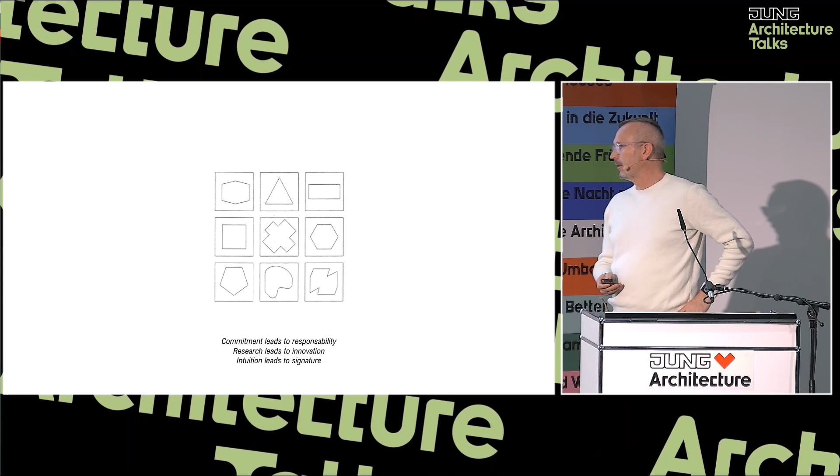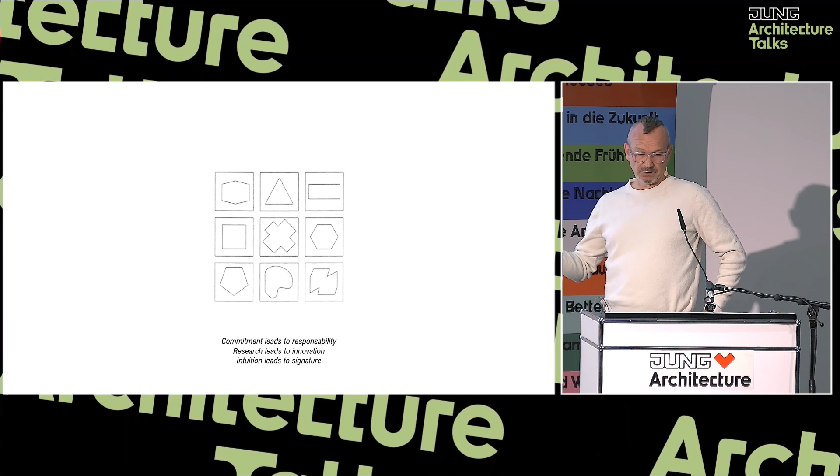We are a researching practice, which sometimes leads to innovation. And of course, for research and the design process, intuition is important because it can lead to our signature.

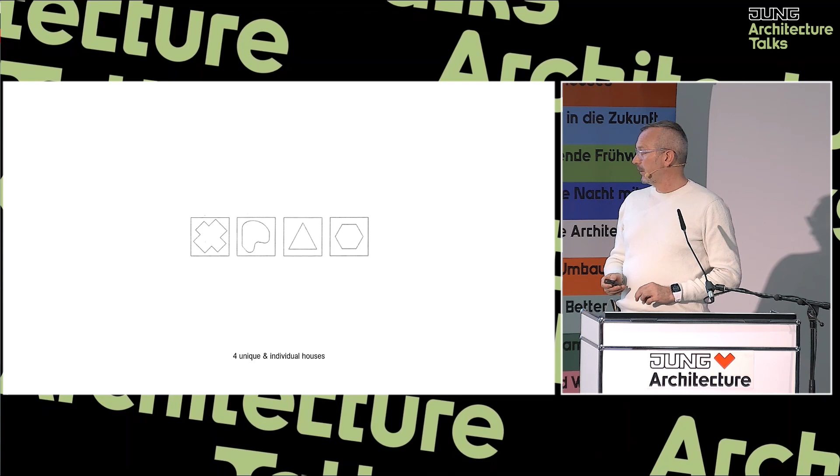So we're looking for 4 projects to present. It's like a PlayStation logo a bit, quite unique. All 4 are built in a hybrid way with brick and wood.

We try to use the material in its honest and best way, because in Belgium we don't have a lot of resources, but brick we have, and a little bit of wood, steel, and concrete, so we try to use them together in the best way.

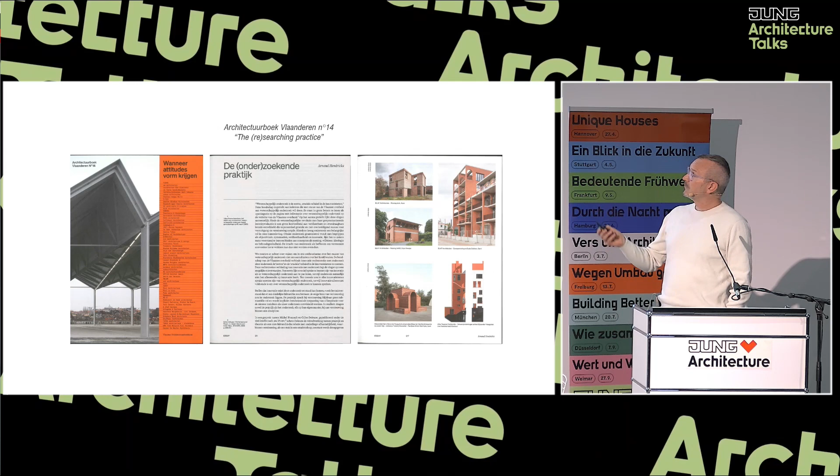We started in 2003, known for our researching and searching practice in Belgium. At the moment we work with 20 people.

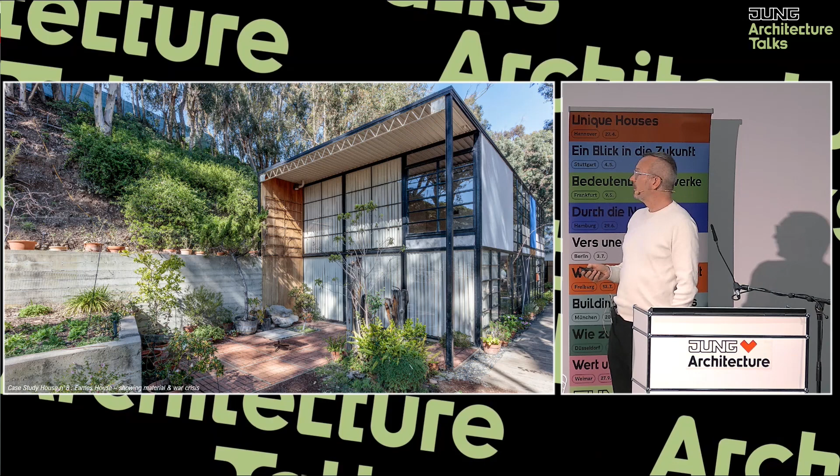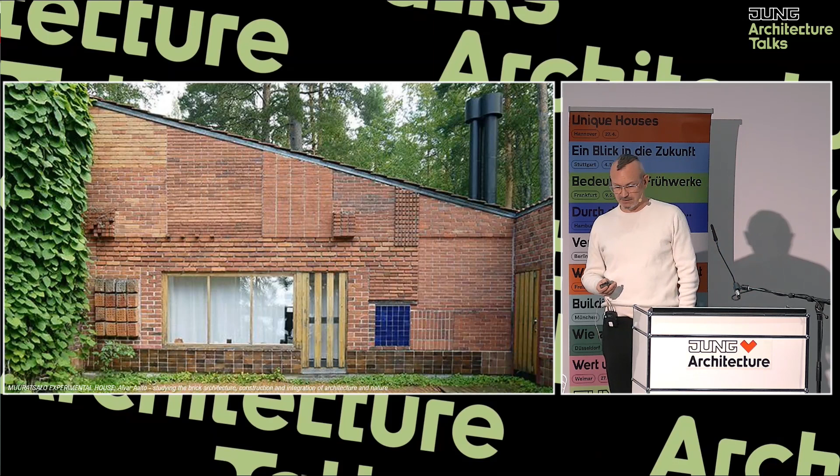First, I'll show some intro. Historically we worked in an experimental way, using the individual house as an experimental process, like the case study houses, where we learned how to show material as it is. Aalto showed us how to integrate nature into architecture, and we experimented with brickwork.

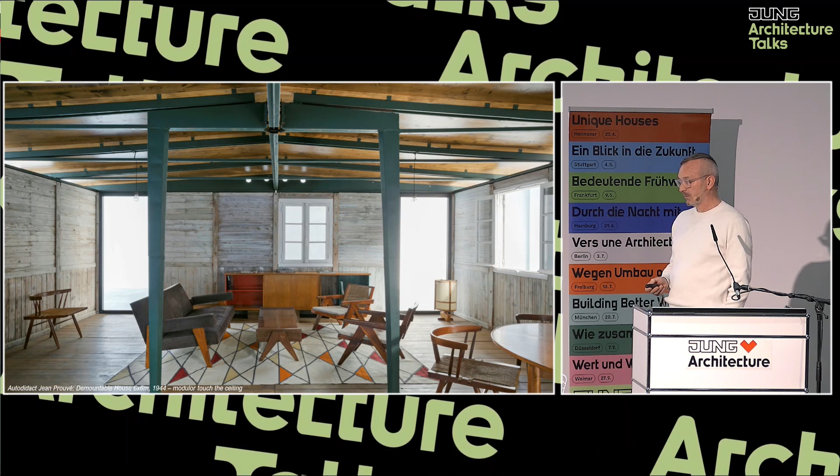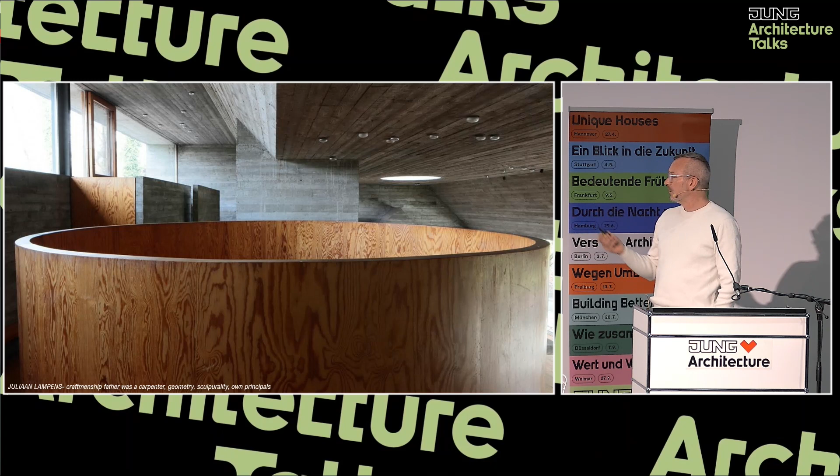The autodidact Jean Prouvé was already looking for demountable houses, and the Belgian architect Juliaan Lampens inspired us in a more brutalist way. His father was also a carpenter, like mine. He worked in the sphere of geometry, building in a sculptural way, and stuck to his own principles.

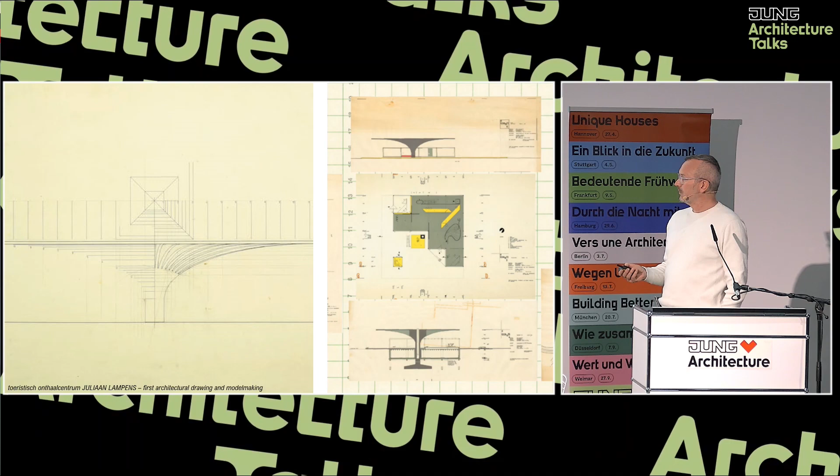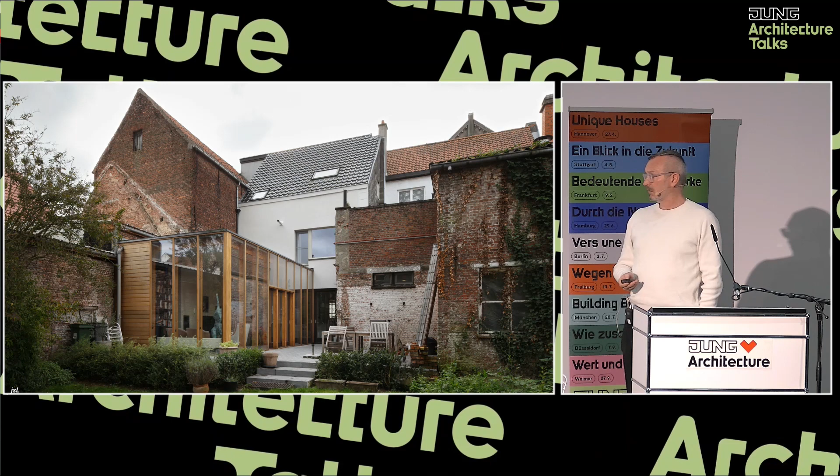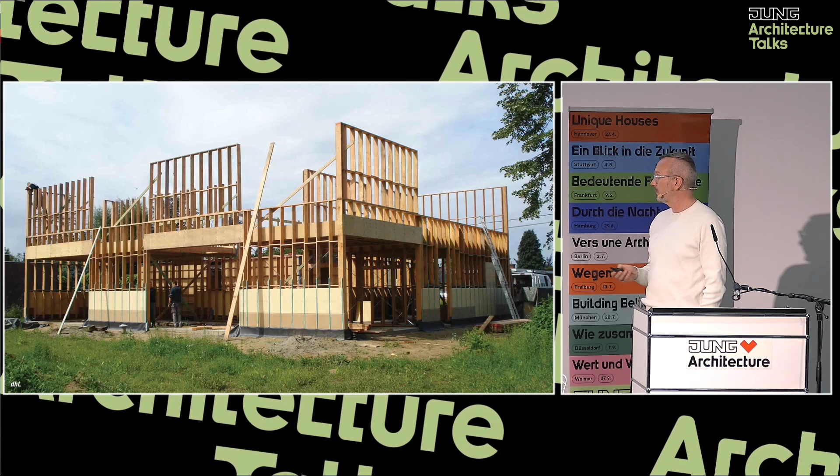Wooden structures — in Belgium we're used to working in massive structures, but we started to build in wood and tried to make all-wooden buildings, experimenting with how we could do it in a bioecological way, which was not evident at that time.

These are all projects from 15 years ago, and we started to build new houses in wood.

At that point, the Trias Energetica came into our way, teaching us the way of passive building. The Trias is more than only the energetic way — it became a way of life for us. The Trias thinking helps us organize our thoughts about architecture.

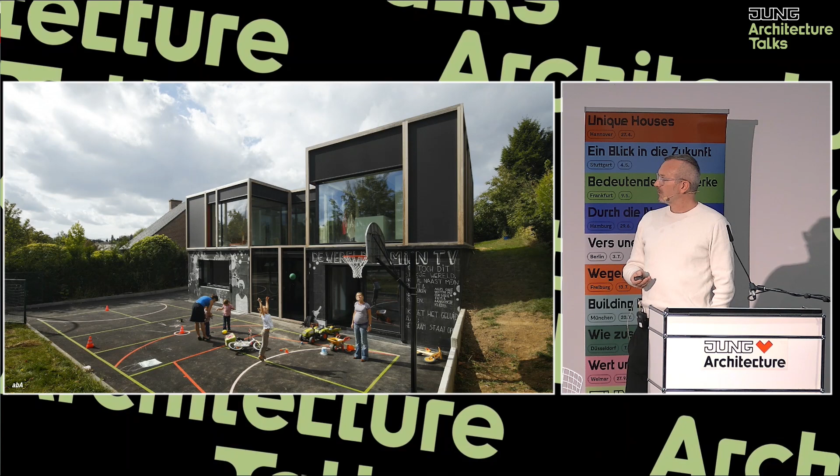So we built one of the first passive houses in Belgium, researching the skin of the building and insulating more. We thought we needed solar gains from the south and a lot of thermal mass on the inside, so we did it as we were taught. But then we experienced that we could do better.

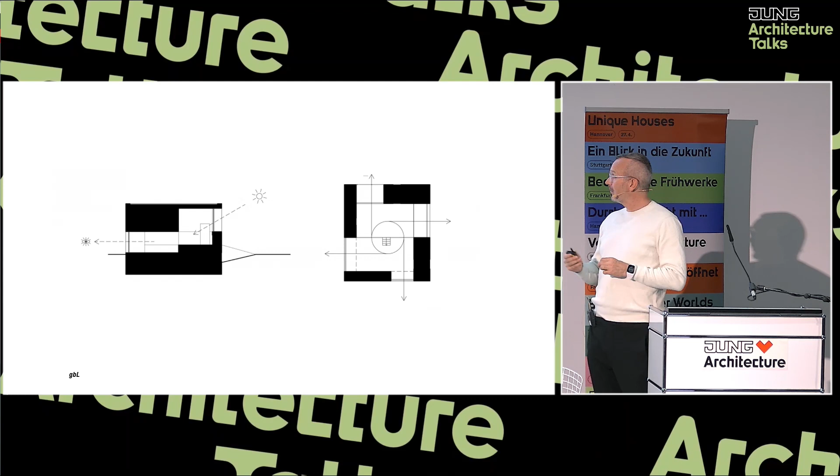It's not only about solar gains to the south — we learned to use what we discovered about passive houses to rethink our architecture, working with the skin of the building, and also with privacy, spatial and social aspects: how the sun comes into the building and goes out, how relationships are, and how architecture can regulate all the feelings you have in a building.

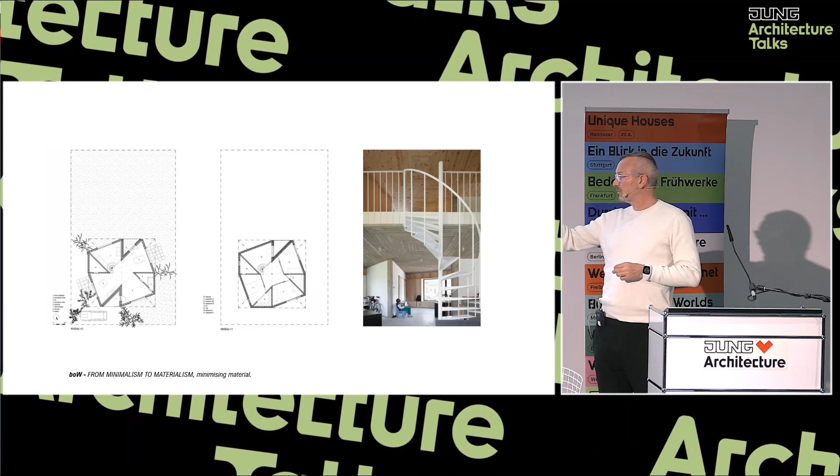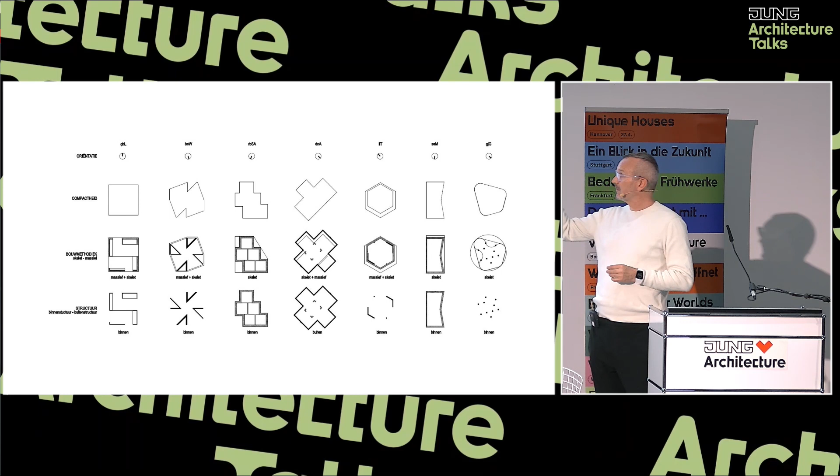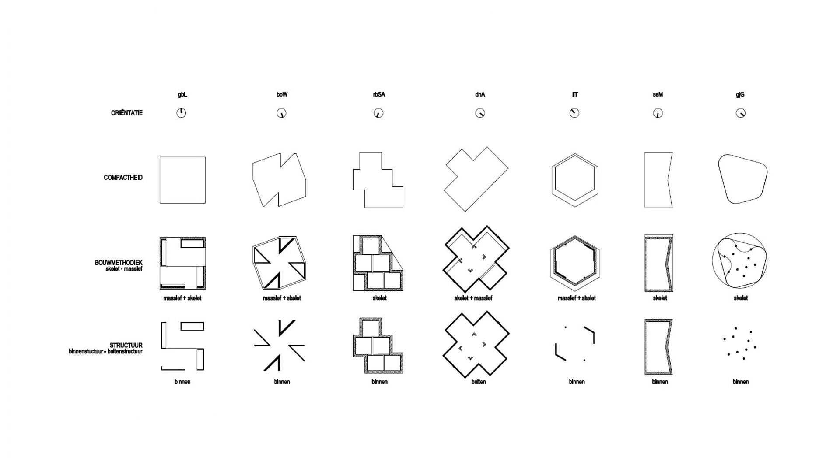So, as a quick overview intro, we worked more compactly, like a sphere or a ball. That's how we came to compact, rather geometrical forms, built in different ways within structures, combining passive design with wooden structures. That's the intro for the 4 houses, which I'm going to present quickly.

The first one is the DNA house, like a Swiss cross.

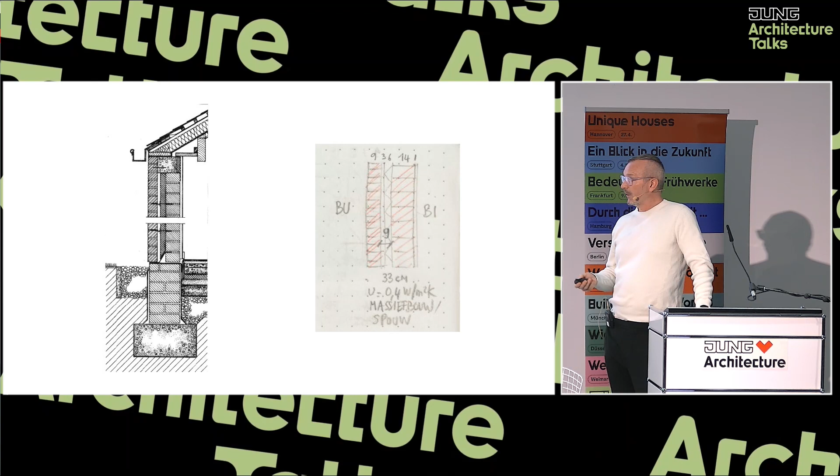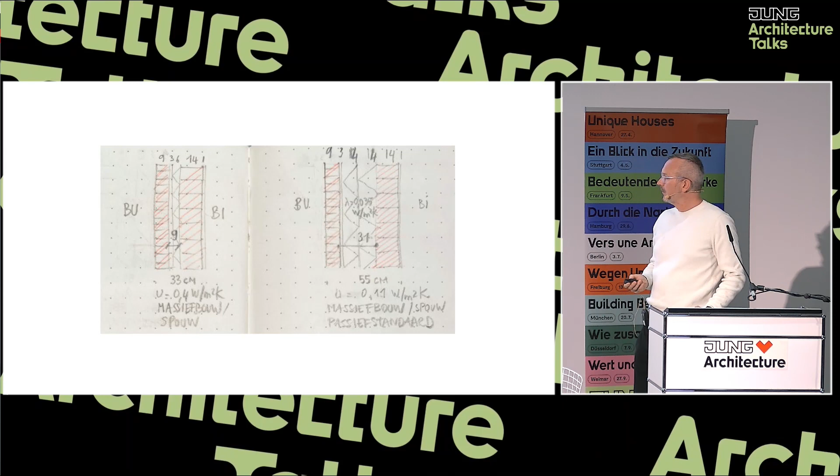Built in brick, because we noticed the first 100 passive houses were none of them in brick, except this one. Why? Because the way of building with the cavity wall system is not logical anymore to build with more insulation.

So it's a project where we first build the wall as a self-bearing structure, like an intelligent ruin, which has like a decor built in it.

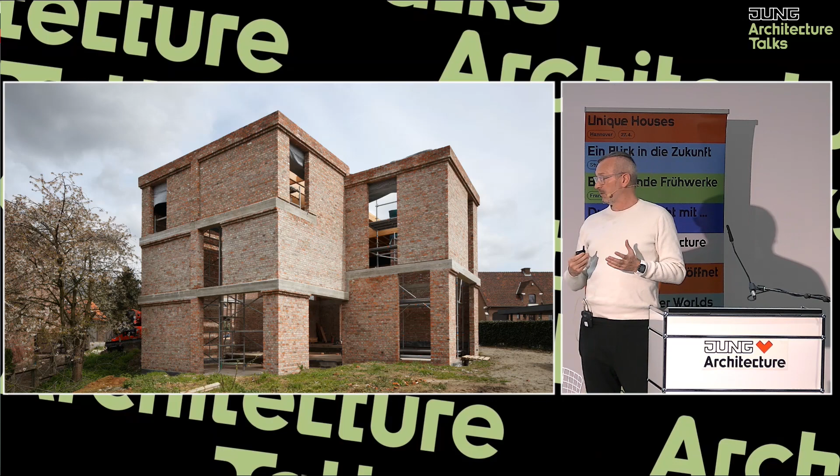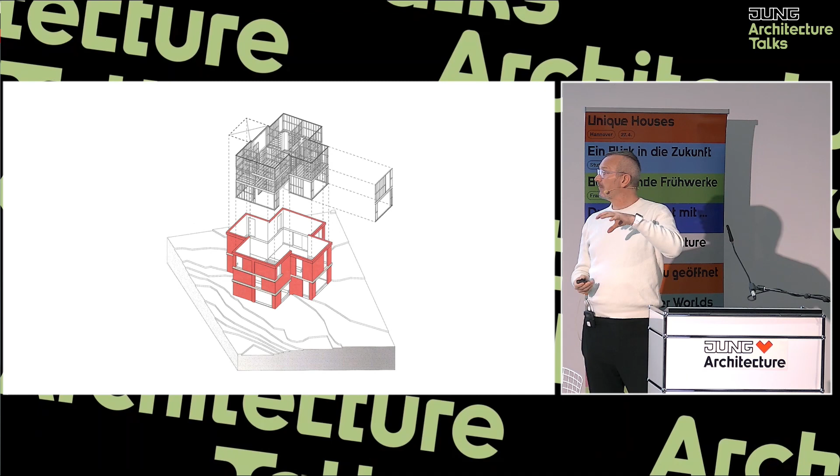Then afterwards, first building the wall, then the roof, and then having the wooden structure into it. Very light one, because it doesn't need to have the wind forces and stuff like that. So showing the material as it is on the inside.

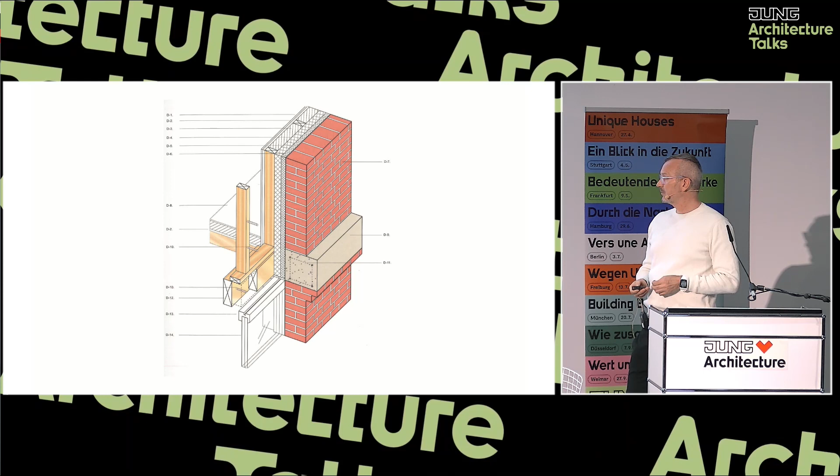Also retracting from the self-bearing wall from the outside, which can be later on filled in as an inner space with no cold bridges, separate from each other, external and internal structure.

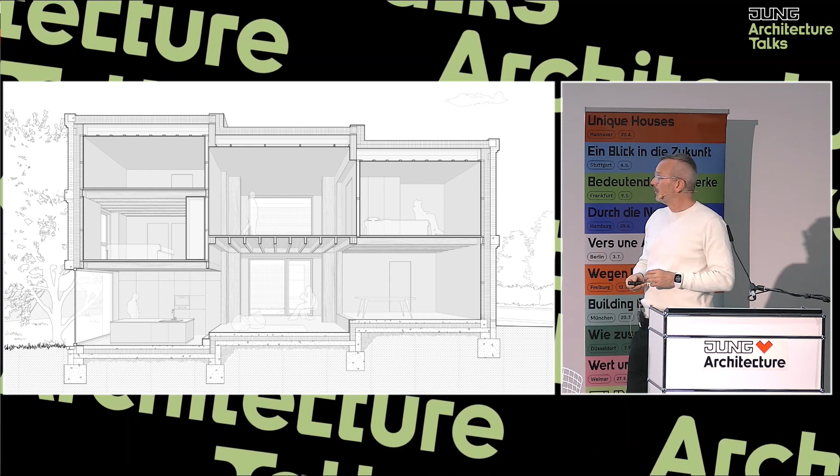And having as many floors, like 3 levels, 2 levels, as compact as we could. So it became this one.

And next one, Hehe house. It's like the same, like brick wall is strong with corners, or you can do it this way by curved walls. So how you can build.

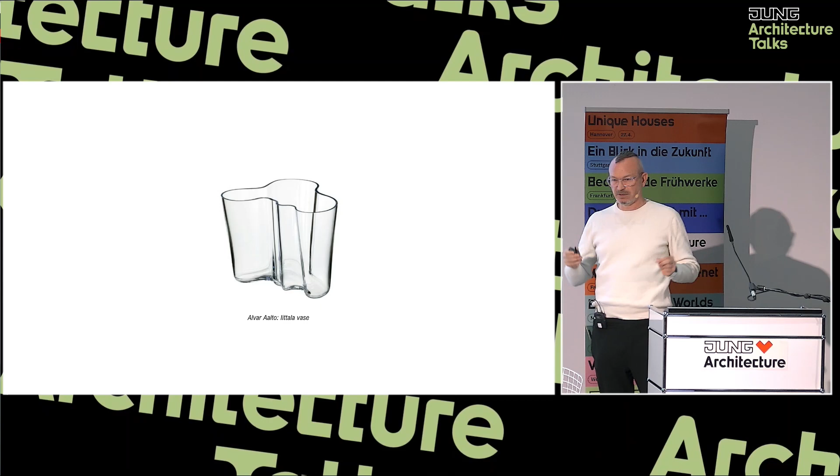It's also curved because we need to build away from the trees. That was also a thought about it, but we thought about a vase, like a self-bearing structure.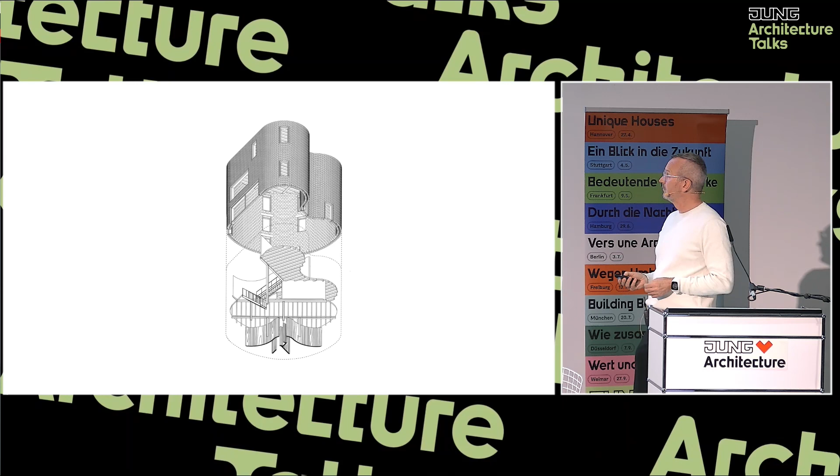And then again, build an inside with steel and wood in it as a very adaptable structure. It seems difficult, but it's all about logical thinking.

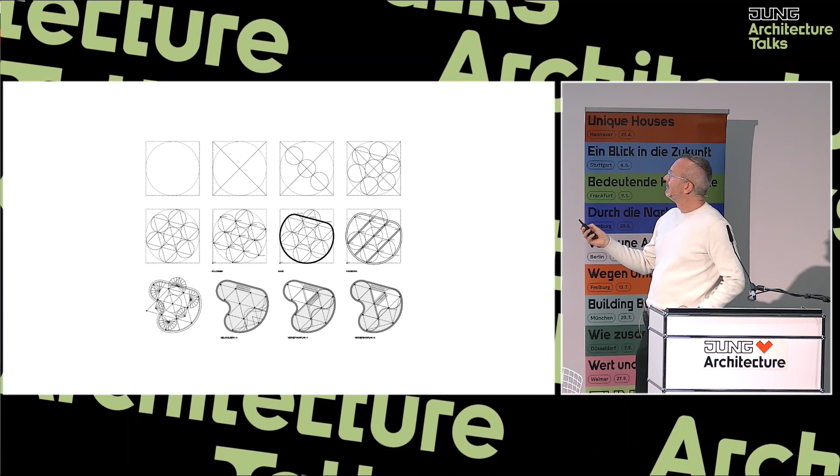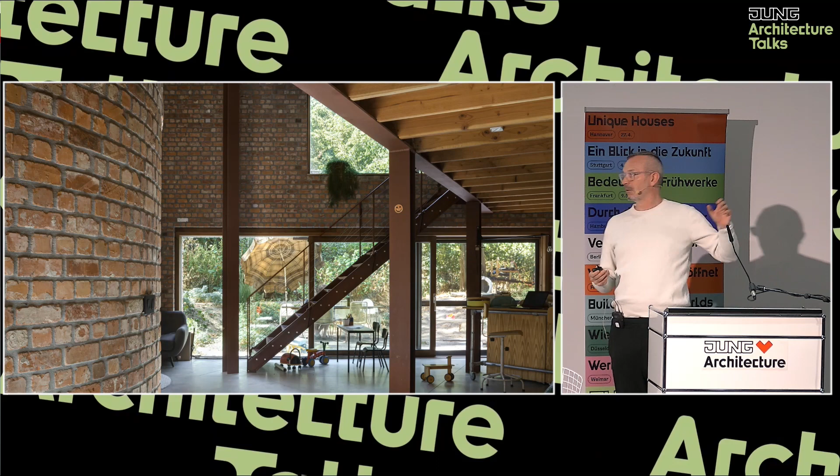And building it with nice craftsmanship, having the air tightness on the outside of the inner wall, using different bricks through each other, and having a nice, massive building.

Next one is a triangular one, because the first two used reclaimed brick, but the workload is a lot.

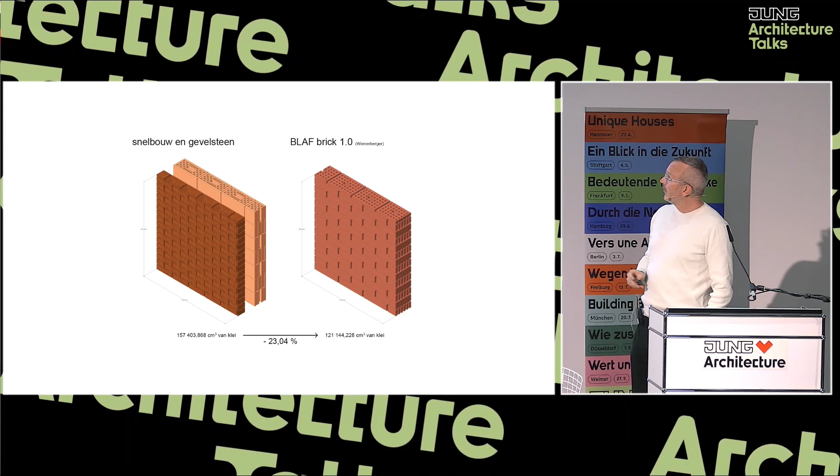So the only thing we do is minimize the outer wall in Belgium, to reduce the ceramic material. But when you go from 2 walls to 1, you reduce even more. So we had an innovation in brickwork, just using the 2 walls together as a fast-making brick wall. But it wasn't on the market, so we produced a new one.

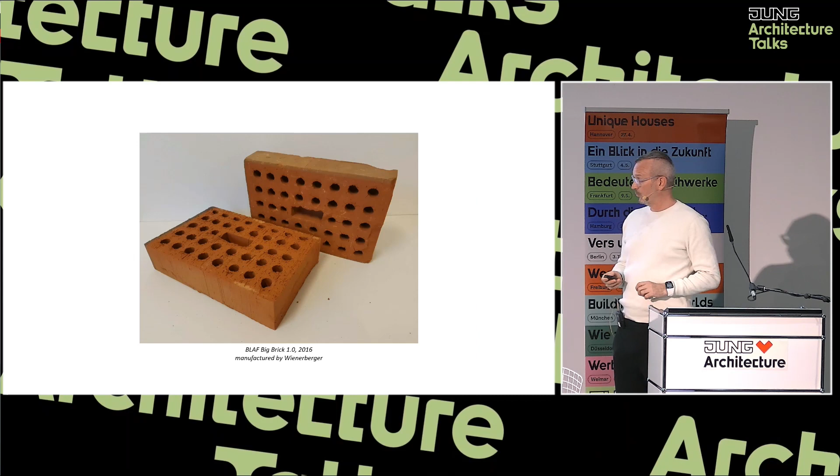And we could convince 4 clients to produce the brick. So it's only used in these 4 houses. And I will present the one on top, the triangular one.

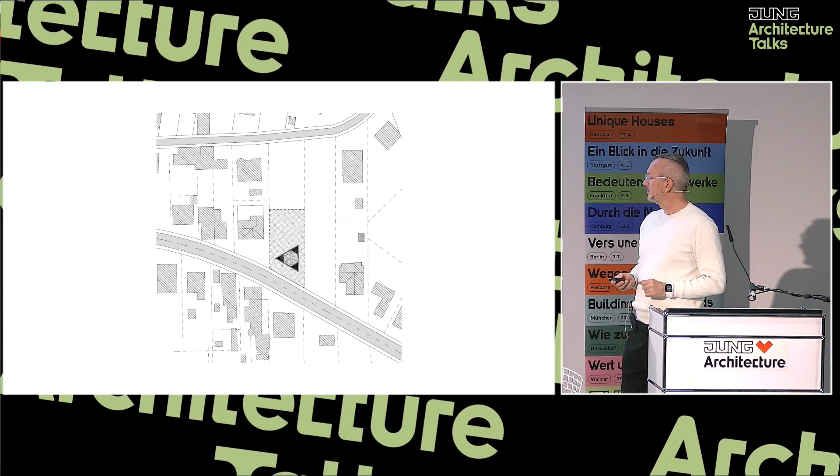Just triangular because of the plot, like in the context. So it's just because of the plot that it became a triangular one.

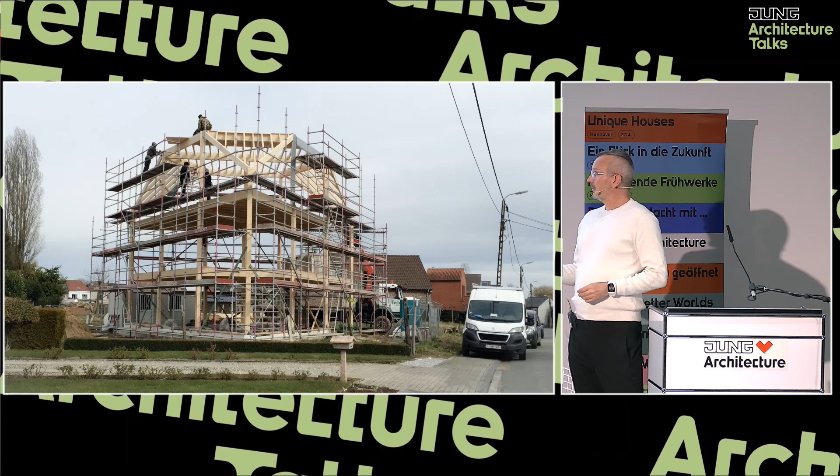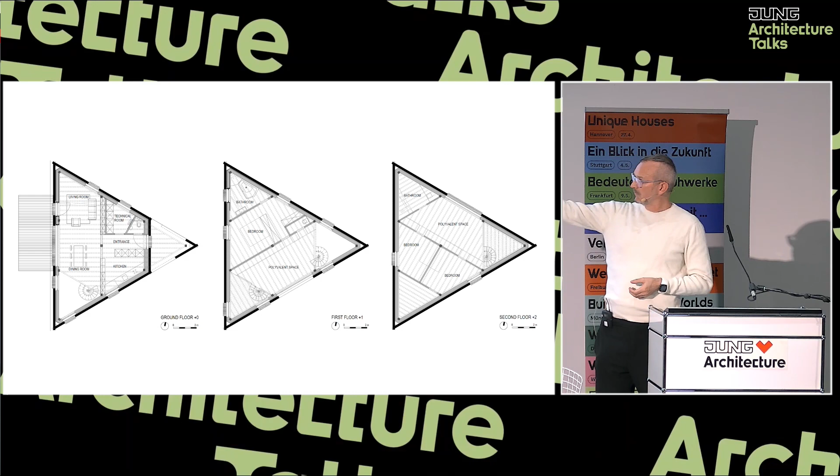In this, we first start to make the wooden structure and afterwards build the brickwork around it. And the triangular shape has 3 sides, so it's always shifting the structure from side to side, having the stairs on the corners, so you have a walk through the building.

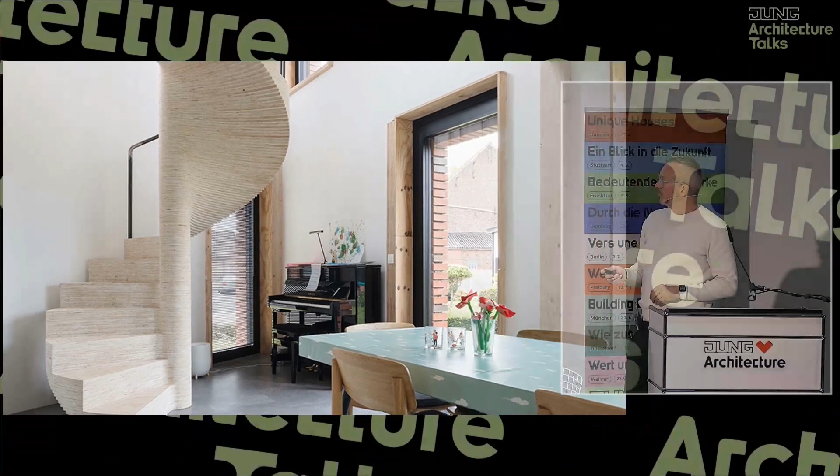And the collective spaces, ground floor to the left, second floor to the other side, and third one also to another one. So the sculptural stairs on the corner.

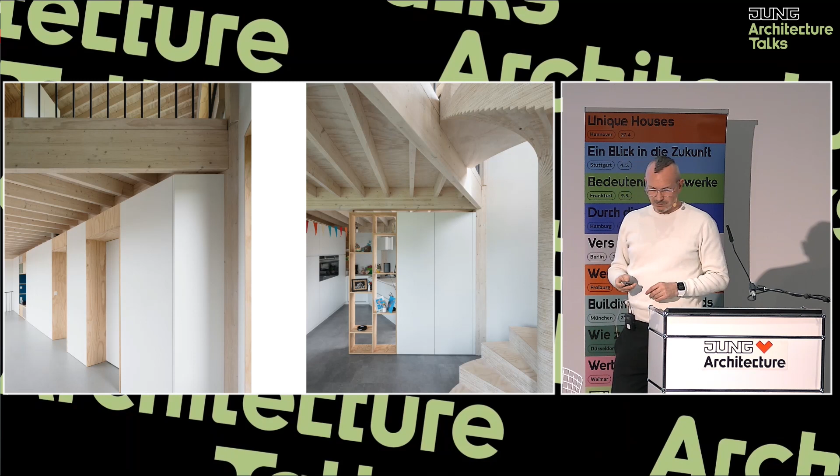And you see the changing of the logical way of doing the loads to different sizes to have light wooden structures in it. So it's always having views to another side of the context.

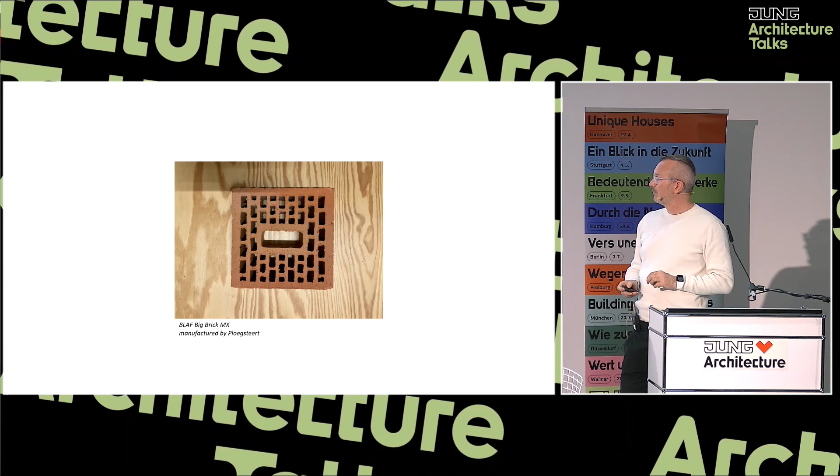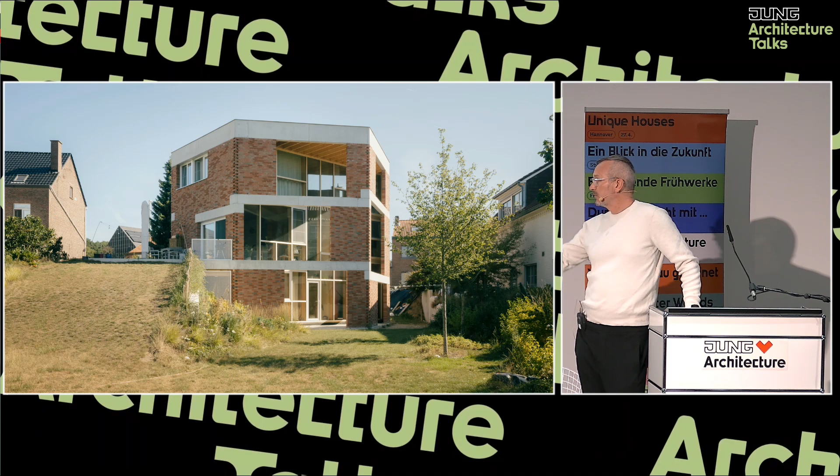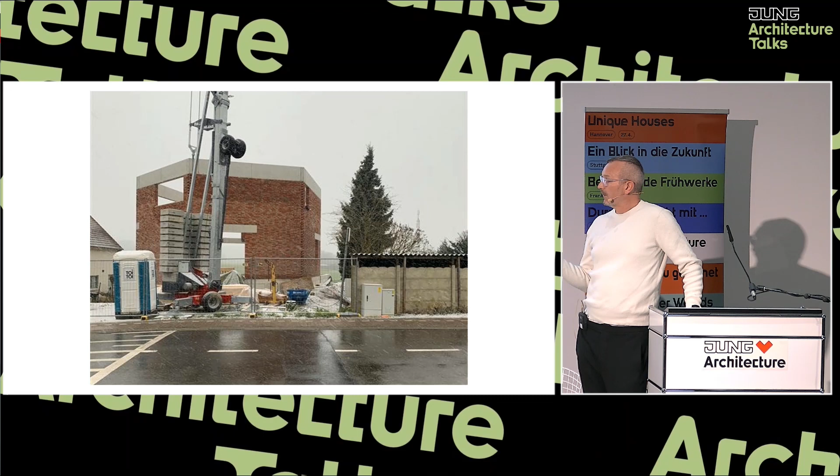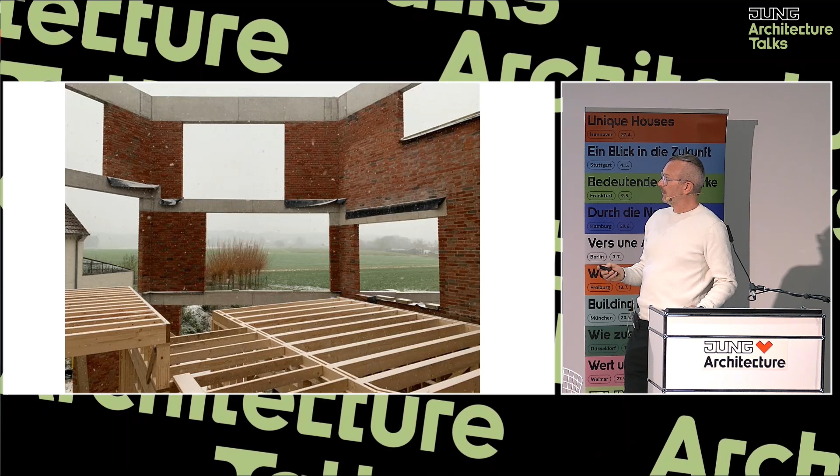The nice thing about this one is that we always try to do better, always build the other way, build another way. But first of all, then the wooden structure, and then we experiment with a hemp lime, because we try to make building as easy as we can.

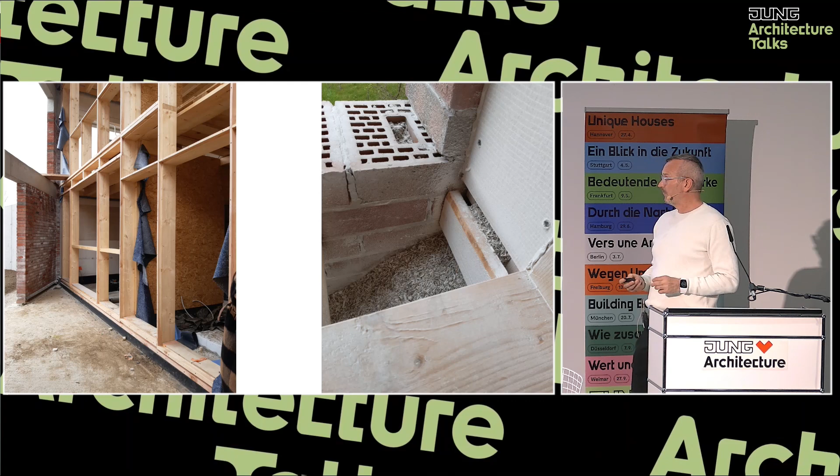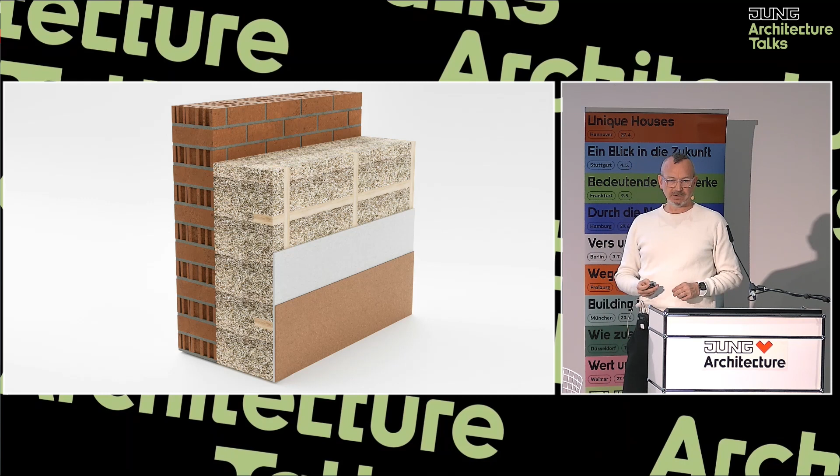Why? Because we are now making large-scale projects, and then the simplicity of building becomes more and more important. We think we can influence the circular way of building in that way, also on a large scale.

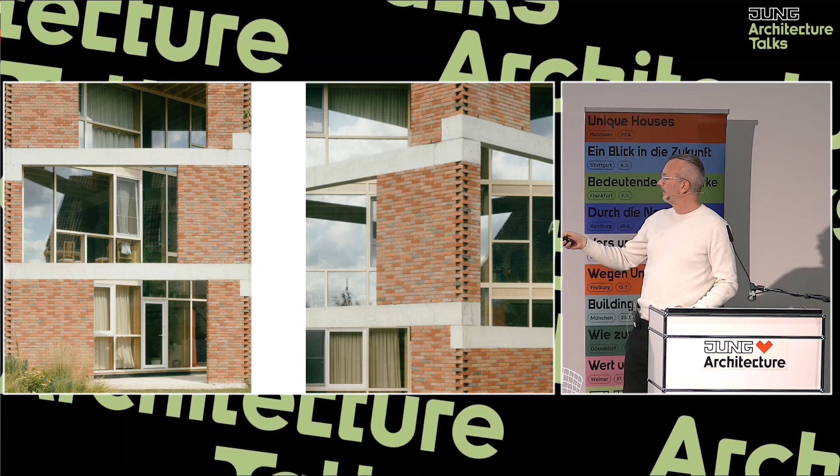So it's a project which is on the street, like 2 levels, at the back 3 levels. Interior, wooden interior, which gives a nice comfort.

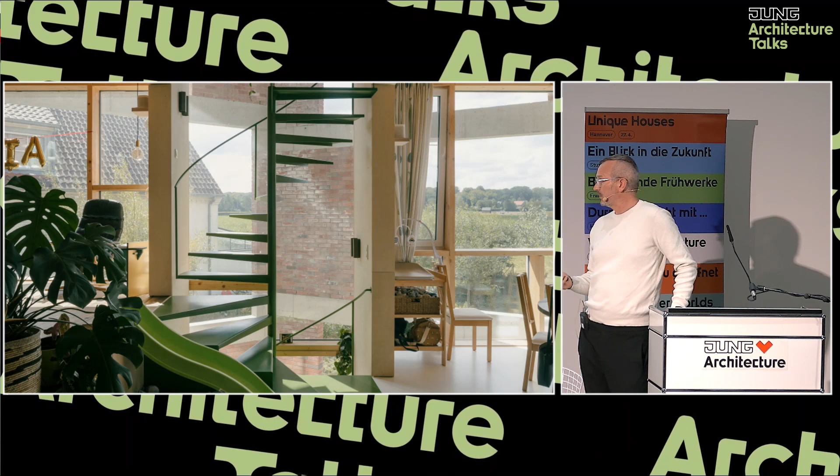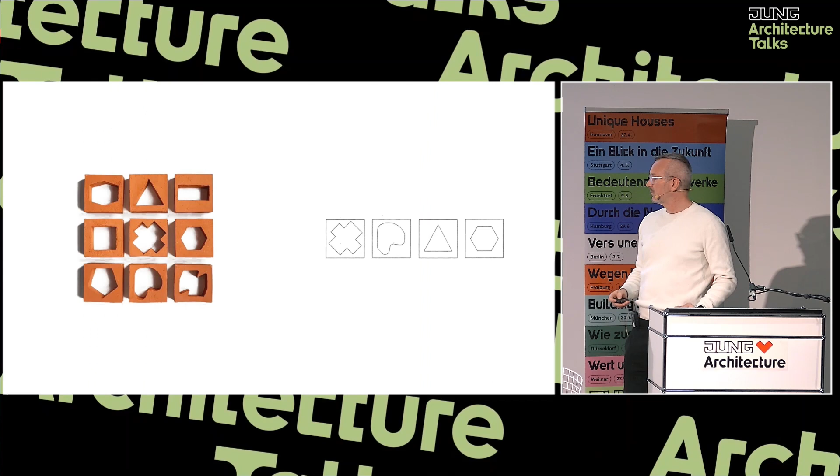I really believe not anymore in massivity on the inside, but the massivity on the outside, the thermal mass, and the wooden structures with a lot of insulation on the inside, because the climate is changing.

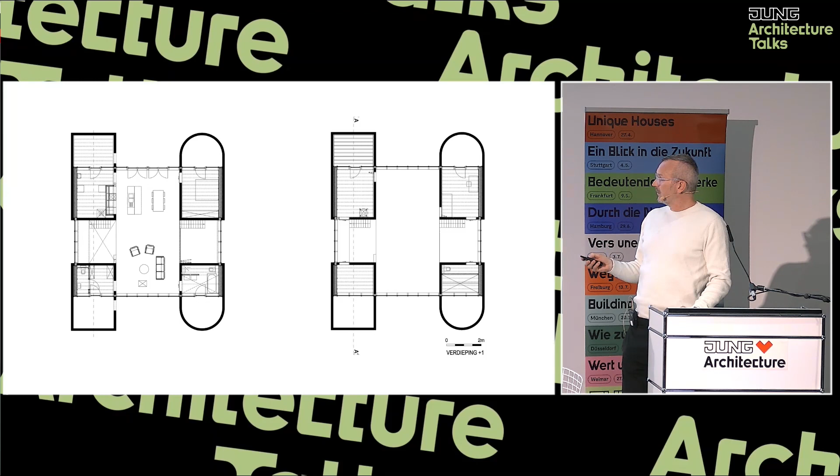So at least we now have another brick just standing, a house which I will not present because of time, but we just use the experimental production now to make more sustainable ways to build, also on the large scale.

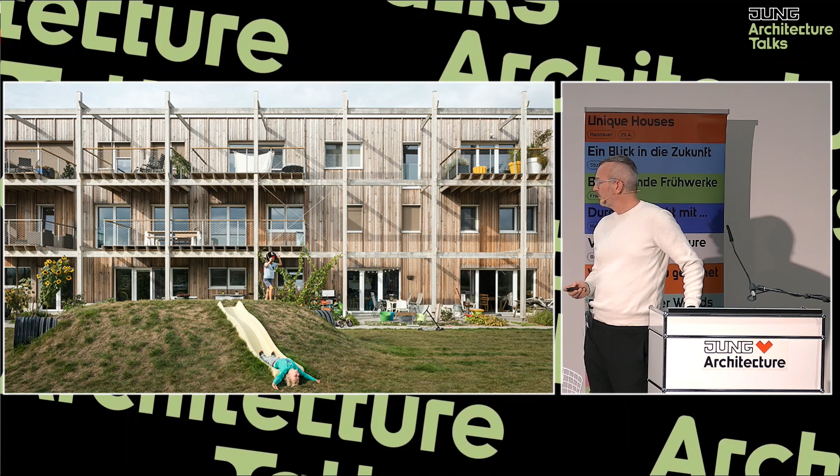We really not only use brick, but we try to do it in different ways, like the co-housing project in wood. So, thank you.